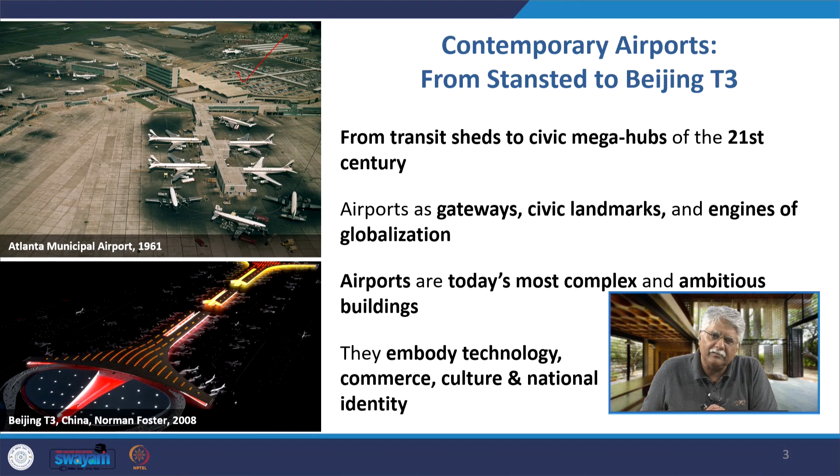Airports have also undergone tremendous change, from being transit sheds, as you see in this picture of the Atlanta Municipal Airport in 1961, just standalone airports. They have now become civic mega hubs and gateways, civic landmarks and engines for global growth. Airports are today very complex and ambitious buildings embodying technology, commerce, culture and even our national identity. So airports shape the first and last impression of a country.

Railway stations also do that, but many times railway stations or these multimodal hubs are confined to particular cities, and they do connect country to country also, but it is the airports which are more the national image that we see while entering or departing from a nation. They function beyond transit. They are associated with tourism, business, diplomacy, and governments invest heavily in airports because they project our national identity. So airports are shifting and now they are becoming mega hubs.

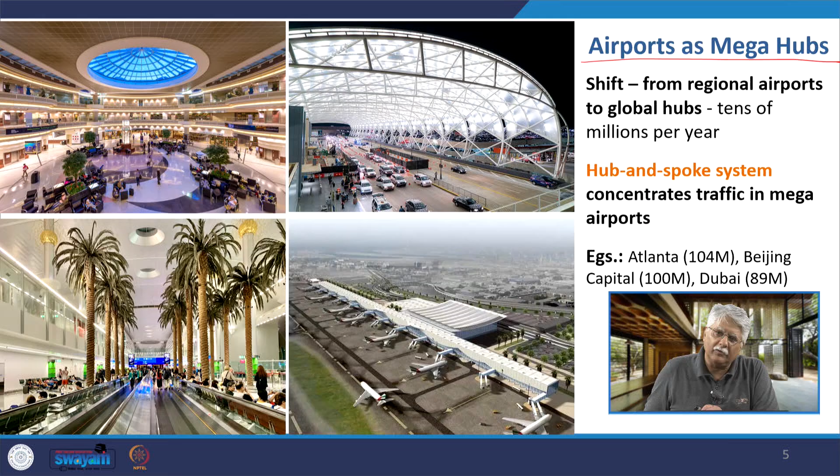From regional airports, there are global hubs. Tens of millions of people use airports every year, and there is a hub and spoke system that concentrates traffic in mega airports. What is the hub and spoke system? There is a central hub airport, like here in the United States in Atlanta, to which many spoke airports like Baltimore, Memphis etc. are connected. Passengers from the spokes converge at the hubs and are transferred to other flights. Many regional flights feed into this single large hub and create very high passenger volumes there. The hub can support frequent long haul flights.

They are massive terminals with very advanced logistics. Therefore, they've evolved into mega airports. In India, for example, when we talk of Delhi, Mumbai and other mega cosmopolitan cities, there we are talking of hub airports, and smaller cities are the spoke airports.

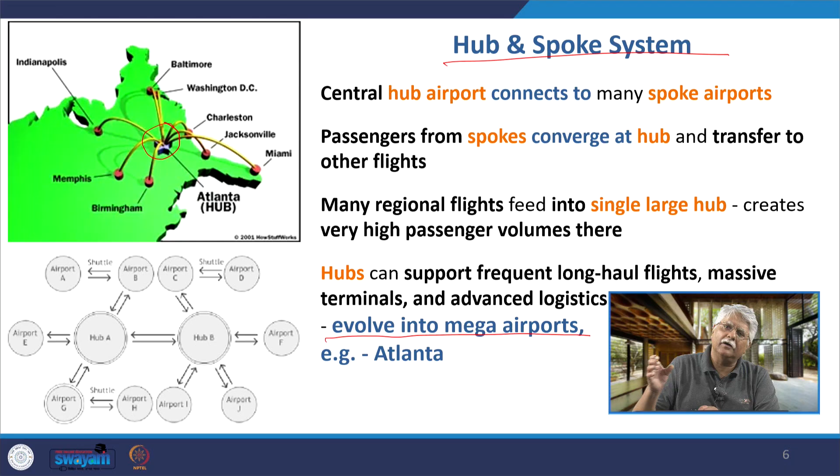And there is a similarity now between global air network and global railway density. This is a very interesting comparison. When you look at these maps, you see that the air traffic chart indicates the airports are confined to specific spaces globally, and very interestingly you find similar areas of concentration of railway multimodal hubs globally. So there is a shared underlying driver between airport hubs and railway station hubs. One is economic activity. Both are concentrated in places that are economically developed or fast developing economies like India and China, and industrialized regions.

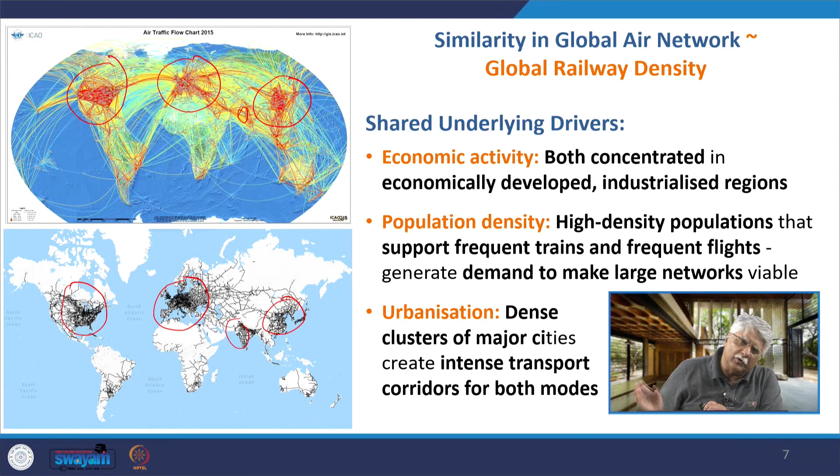The population density is a factor, where high density population supports frequent train and frequent flights, so that the demand is generated to make these large networks viable. Urbanization is a factor. Dense clusters of major cities create intense transport corridors for both these hubs. In many cases, airports and railway stations are part of the same multimodal system. For example, in Heathrow Airport, not only is it an airport, but it also has underground railways connected or linked with the airport, and similarly it's true for the Frankfurt Airport.

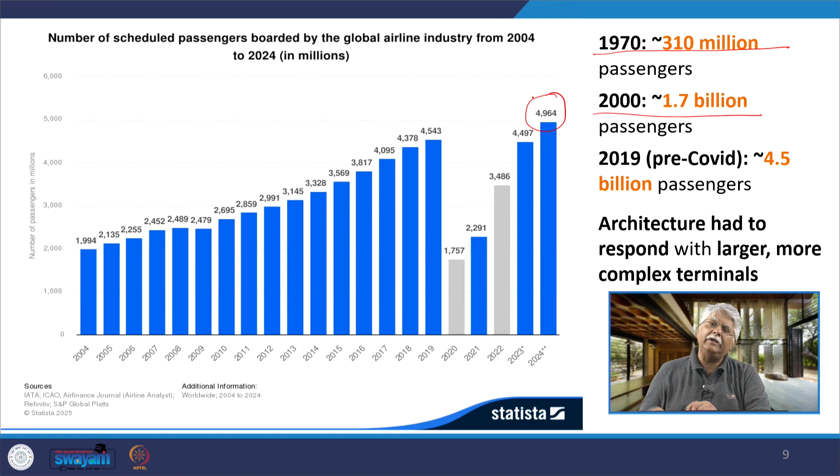This shows the growth in air traffic over the years. From about 310 million in 1970, it grew little over 5 times within 30 years to 1.7 billion, and by 2019, pre-COVID, 4.5 billion people were traveling by air annually. Architecture now had to respond to much larger and more complex terminals. As of 2024, about 4.9 billion people have traveled globally through air.

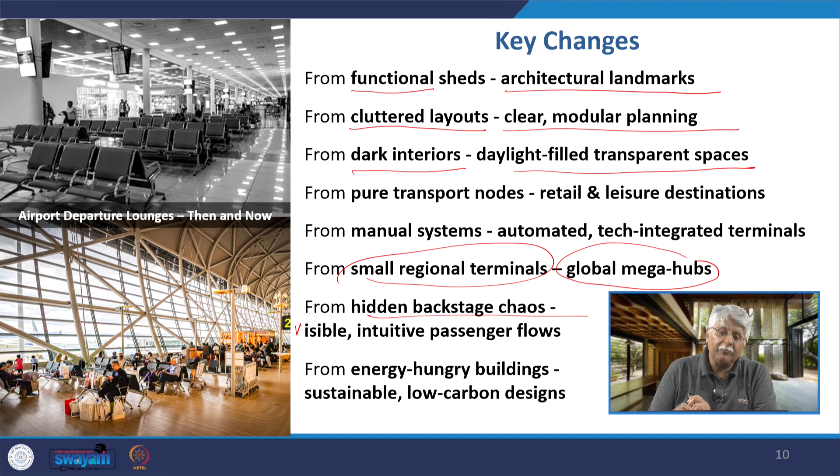So what are the key changes if we look at that once more together? One is from functional sheds, they are becoming architectural landmarks. From very cluttered layouts, there is very clear modular planning. From very dark interiors to daylight filled transparent spaces. From small regional terminals, they are becoming global mega hubs. Instead of a lot of hidden backstage chaos, there is visible intuitive passenger flow happening. And from energy hungry buildings, we are having sustainable energy efficient buildings today.

The other changes are in security protocols, particularly after the events of 9/11. Passenger comfort has increased tremendously. Commercialization has grown tremendously in airports with duty-free shops and retail.

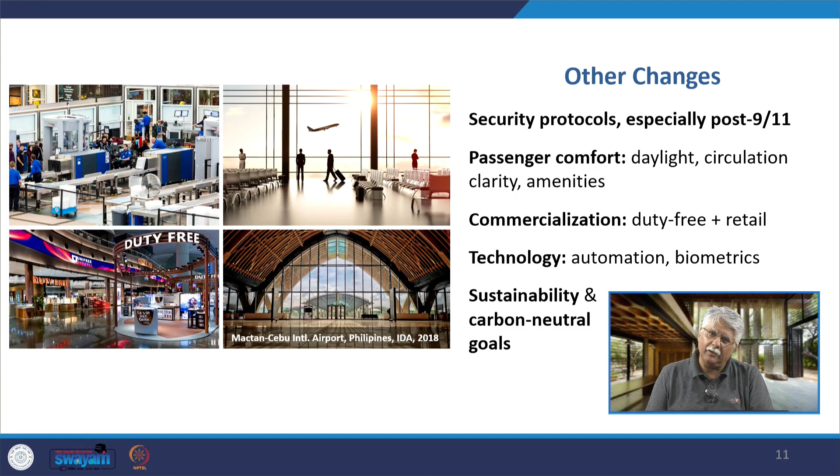Technology like automation and biometrics have become very dominant in modern airport hubs. There are sustainability and carbon neutral goals associated with airports. So they have become architectural icons today.

In the early 20th century, airports were more like utilitarian hangars and sheds. By mid 20th century, with the first machines for flying, they started becoming engineering marvels. By late 20th century, airports had become architectural statements, but today they are a hybrid of infrastructure and civic architecture.

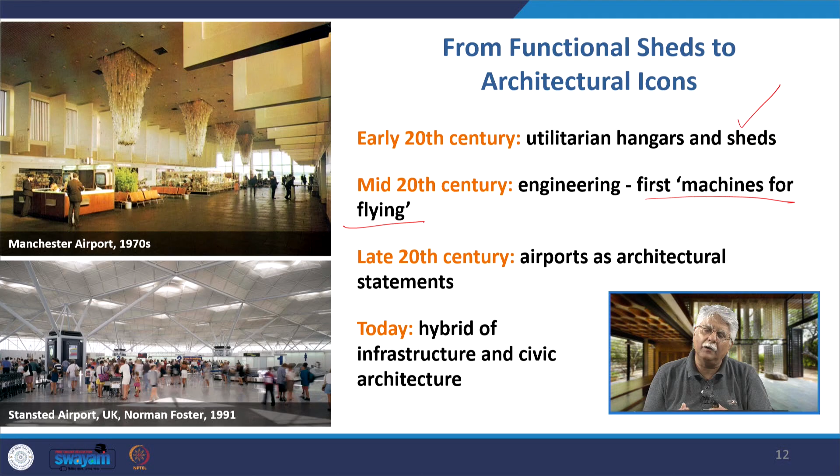They are multi-modal hubs globally. If you look at airport as civic architecture, they shape a city or nation's identity, like railway stations used to do in the 19th century. They act as gateways to nations and serve as symbols of technological progress and global connectivity.

Contemporary airports have grown into urban hubs on a monumental scale. They are very large, ambitious buildings with vast interiors, soaring roofs, and dramatic structures. What railway stations had done, today airports are doing. This is the Beijing T3 terminal, designed to inspire awe and civic pride.

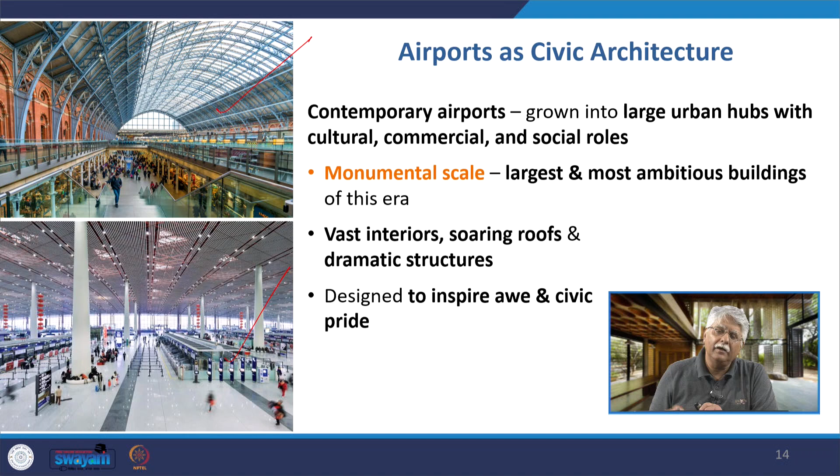They are also an architect's stage today. Star architects are associated with airport projects. These are very high profile commissions with world famous architects, signature projects just like museums are today, that define an architect's career and a nation's image.

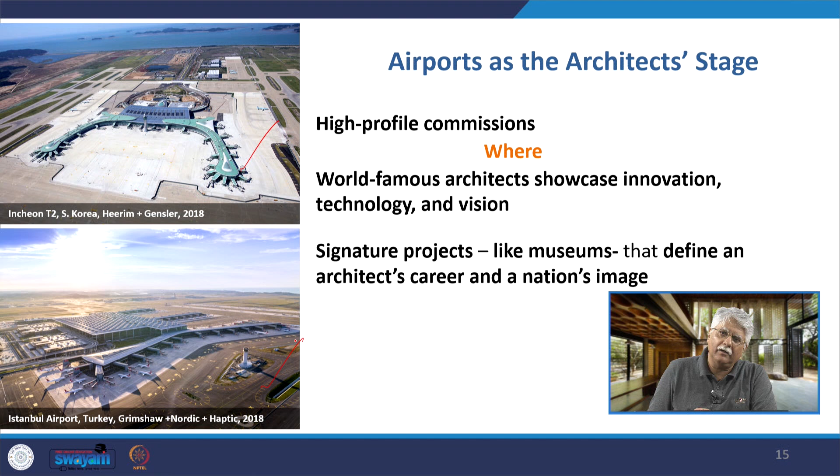For example, tremendously amazing airports like the Incheon T2 terminal in South Korea, or the Istanbul terminal by Grimshaw and other architects. So design here is seen as strategic. It improves efficiency, overall passenger experience, and the nation's branding. No longer just engineered spaces, they are architectural showcases.

For example, in Incheon Airport in Korea, they first had the original terminal, Incheon T1, built in 2001 by Fentress. Now the new one shown in the previous picture, the T2 terminal by Heerim and other architects, was built in 2018.

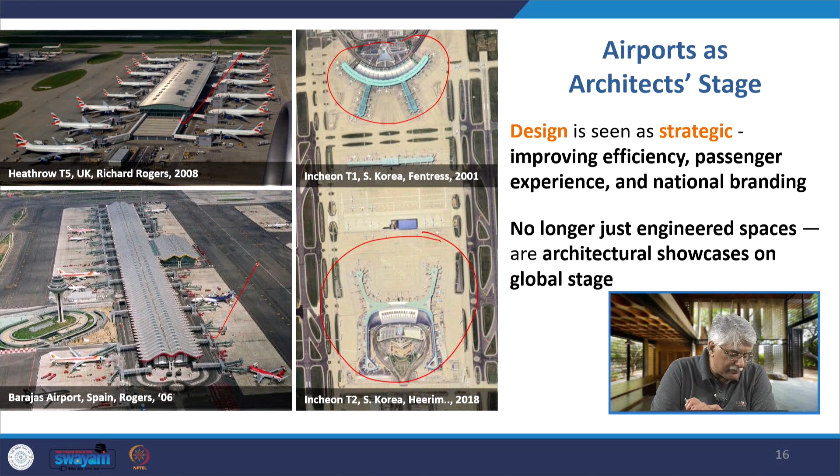Then there are other big terminals like Heathrow T5 and Barajas Airport, both by Richard Rogers, which we'll look at in detail, examining high tech and beyond. High tech architecture is the natural home of modern airports. Exposed structures, long spans, and modular grids are all associated with high tech architecture.

The original raw spaces like Lloyds of London, with exposed surfaces on the outside as I taught earlier, have now become experience-centered designs. There is a huge amount of technology that goes into making an airport, and high tech architecture really suits this brand of building or typology.

Airports are urban systems, as I was telling you. In fact, the new word being used for them is aerotropolis or airport city, coined by John Kasarda. Aerotropolis is a city-like urban form where the airport functions as a central hub around which there are business facilities and hotels.

Here is the Chek Lap Kok Airport in Hong Kong by Norman Foster, which brought about a tremendous revolution in modern airport design. It was a massive terminal built on a man-made island, but today it also has a hotel and a convention center, making it an aerotropolis.

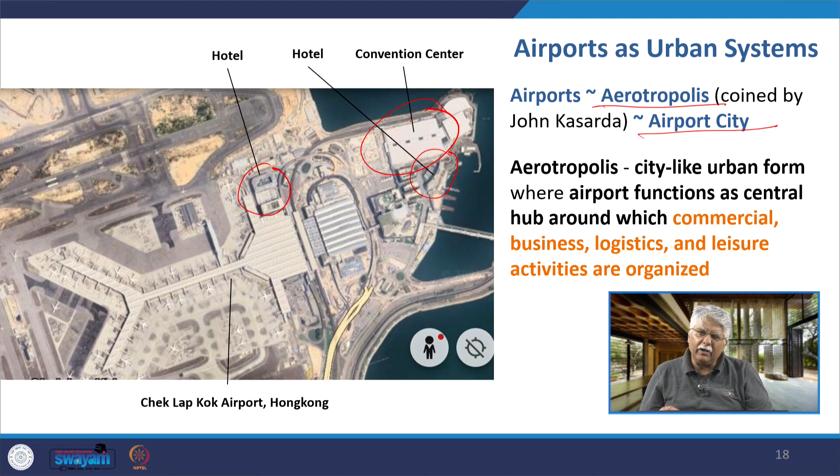Airports are therefore not just terminals, but like mini cities with hotels, convention centers, and transport nodes, equivalent to railway multimodal hubs. They are transport-driven ecosystems, and places like Dubai, Incheon, and Singapore's Changi Airport are all clubbed under this airport city category, where urban planning meets architecture.

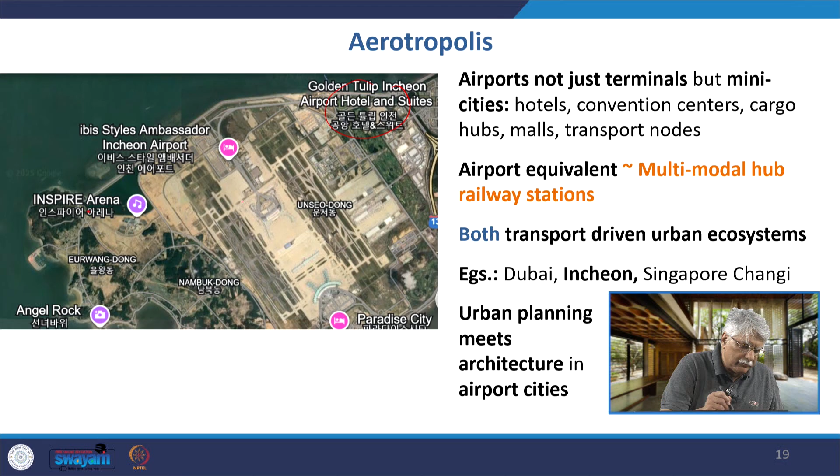For example, here in Incheon also you find the hotel and a lot of other facilities surrounding the Incheon airport in South Korea.

There is a timeline of landmark airports in which Stansted plays a very important role as a prototype of the modern contemporary airport. Then we have Kansai, an engineering marvel built on a man-made island in 1994 by Renzo Piano. Chek Lap Kok, also on a man-made island, a mega hub by Norman Foster in 1998. Barajas, which we will see in detail, is termed civic humanism. And Beijing T3, which is a global spectacle.

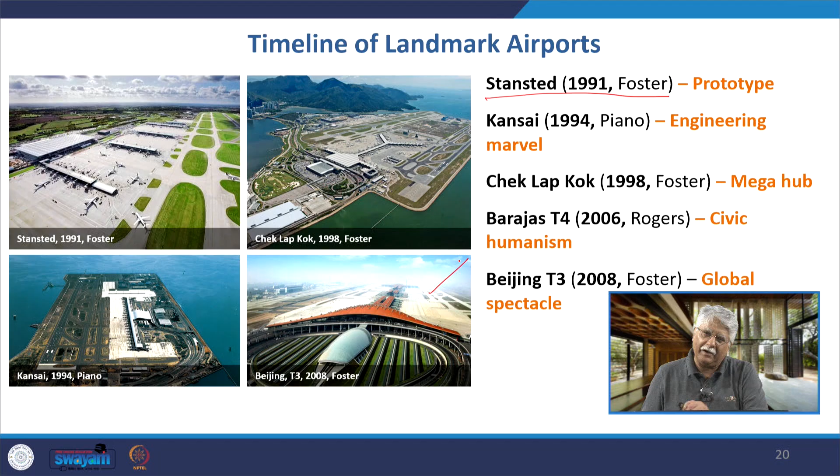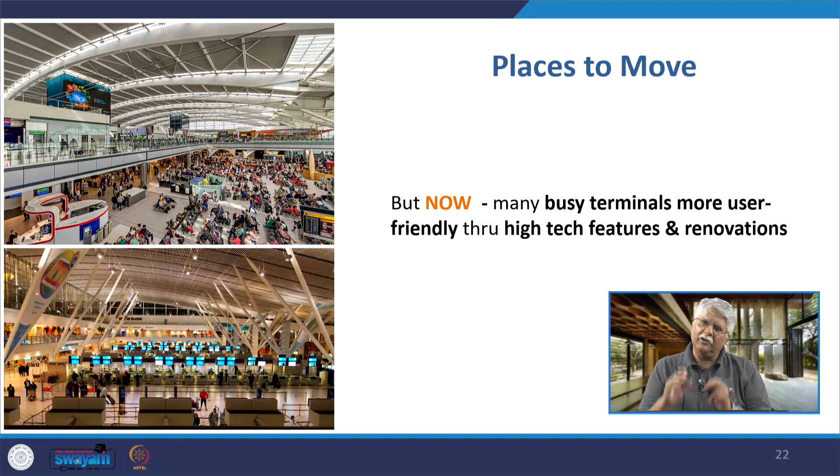In the 1970s and 80s, a surge in global air travel made big airports across the world very crowded and chaotic. But now, very busy terminals are much more user friendly with high tech features and renovations done in them.

If we look at a historic context, we need to go back to Stansted Airport in 1991. London needed a new airport because of increasing capacity. The previous airports like Heathrow and Gatwick were very cluttered and confusing. The aim was to have a very clear, legible, passenger-centered airport.

And this particular airport by Norman Foster challenged the very accepted rules of terminal design and went back to the roots of modern air travel. And so it is said that at Stansted, Foster transformed the terminal into a kind of cathedral of travel. This was a quote given in the New York Times.

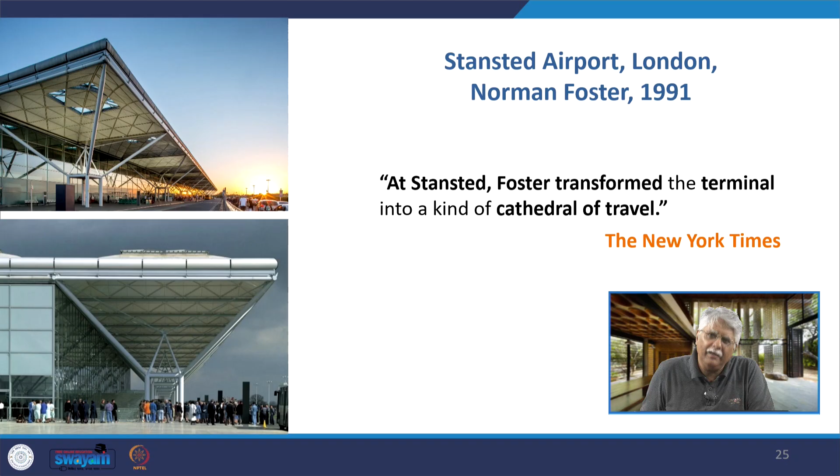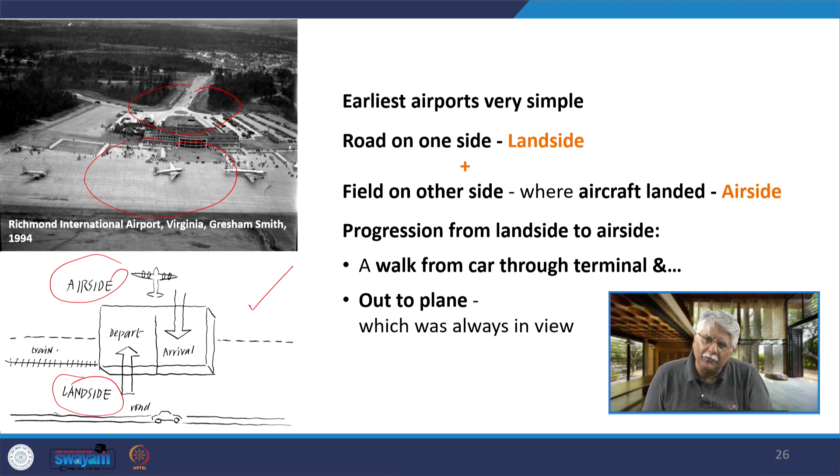What really happened? You see, the earliest airports were very simple. There was a road on one side, and then the flights took off on the other side of the terminal. This small sketch indicates that there is the land side where you come to the airport or you depart from the airport, and then there is the air side. So the progression from the land side to the air side was very simple. You walk from the car through the terminal and out onto the plane, which was always in view. But over time it became very crowded and chaotic.

What Norman Foster tried to do in Stansted was to recapture this clarity, to recapture this romance of air travel, this amazing thing that you are able to see flights land and take off, and throughout the airport there is this clarity and legibility. So Foster's sketch that you see here shows there is a very simple passenger flow, clear orientation, linear circulation from drop off to check in and the various other steps that we take before we get into a flight. There is transparency and visibility.

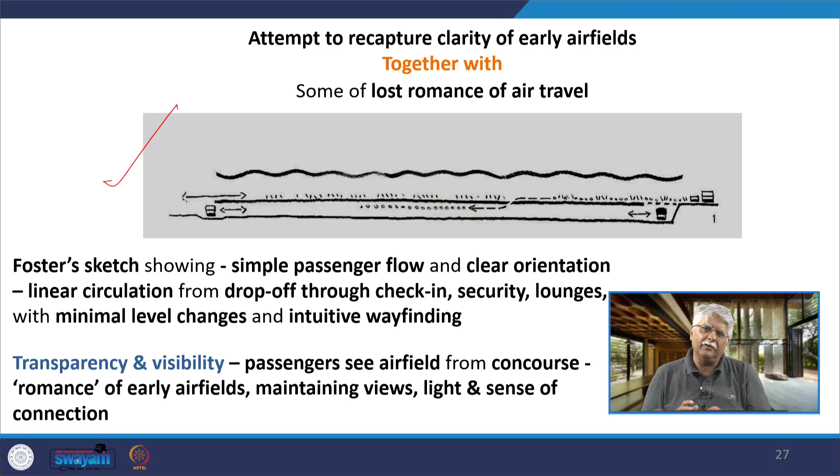Passengers were able to see the airfield when they were in the concourse. The romance of the early airfields, which maintains the views, brings in a lot of natural light and a sense of connection. Thus, Stansted Airport began with what came to be called a single envelope design. An airport terminal where all the functions are enclosed under one continuous roof volume and not scattered in multiple small buildings.

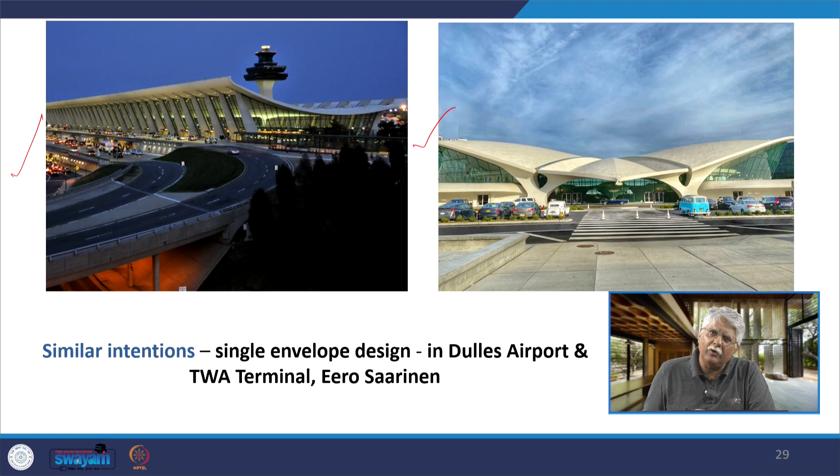Now I will have a check on this single envelope design because there have been two previous designs which had a similar intent, both designed by Eero Saarinen, the Dulles Airport and the TWA Terminal, which I have already discussed with you under late modernism. Both of them were single envelope designs. Why was Norman Foster's design so different or unique, though it was carried on from the same idea? Because he revived the concept of modular high-tech construction in the Stansted Airport.

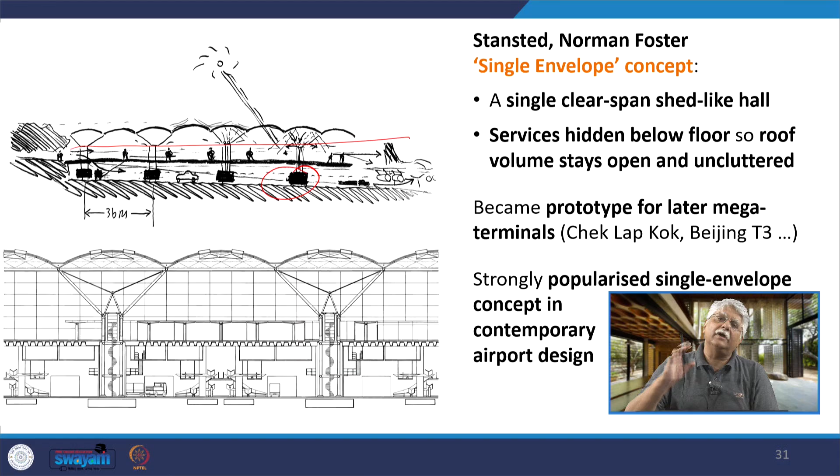So this single envelope concept has a clear span shed-like hall. Services were hidden below the floor under the concourse, so that the upper volume remains completely open and uncluttered. It became a prototype for all the mega terminals to come and strongly made the single envelope concept popular in contemporary airport design. It reversed the hierarchy, turned the building upside down, removed all the heavy services and took them to the undercroft of the building, keeping the concourse level completely free.

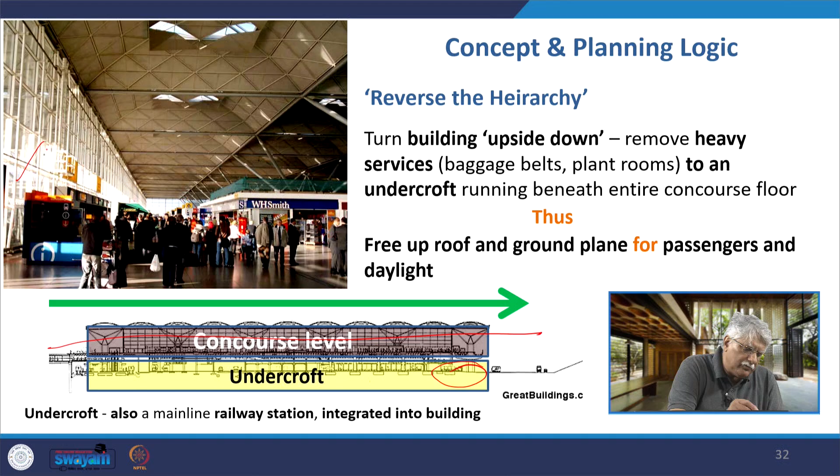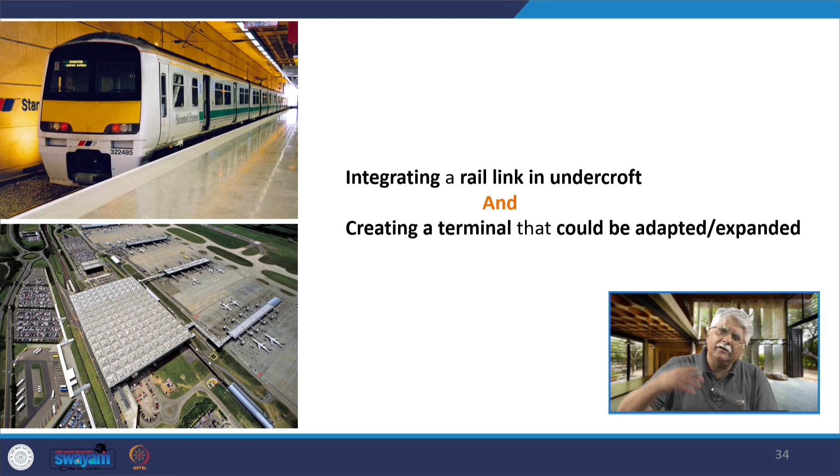Thus it freed up the roof and ground plane for passengers and daylight, as you see here in this picture and other pictures that I will show you. So the concourse became a single volume and the rail link was there in the undercroft, creating a terminal that could be adapted and expanded. So this modularity, the ability potentially to expand, began early from the Stansted Airport.

There was also light, space and wayfinding. From the traveller's point of view, the movement through the entire complex became very straightforward and direct. There were clear sight lines. The passengers could see the aircraft, the gates, the exits very easily. There's a lot of visual openness and that reduces stress and confusion when people travel. Travellers always know where they are in the Stansted Airport, which way they are facing. They can see all the 4 glass walls. It's a very huge enclosed space.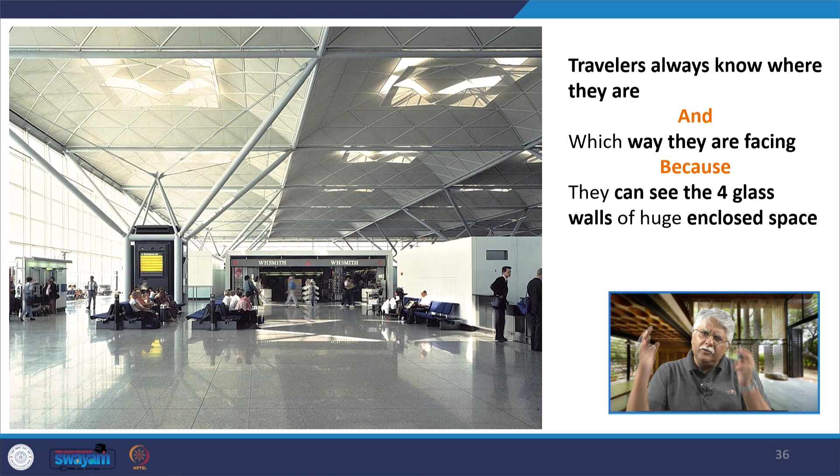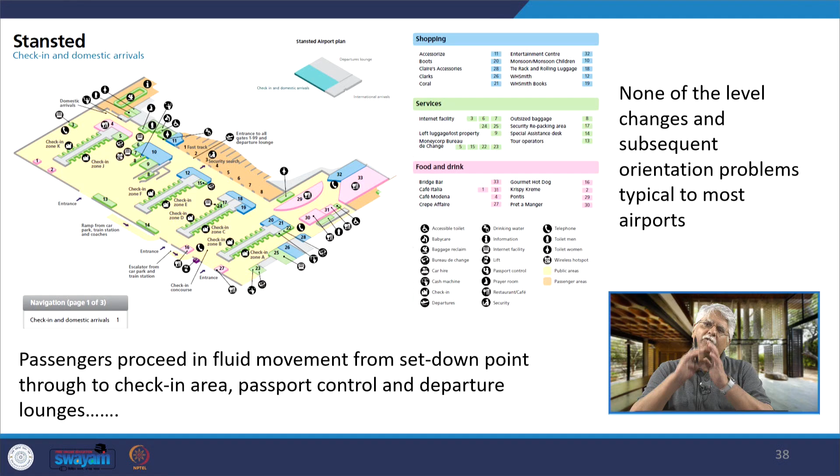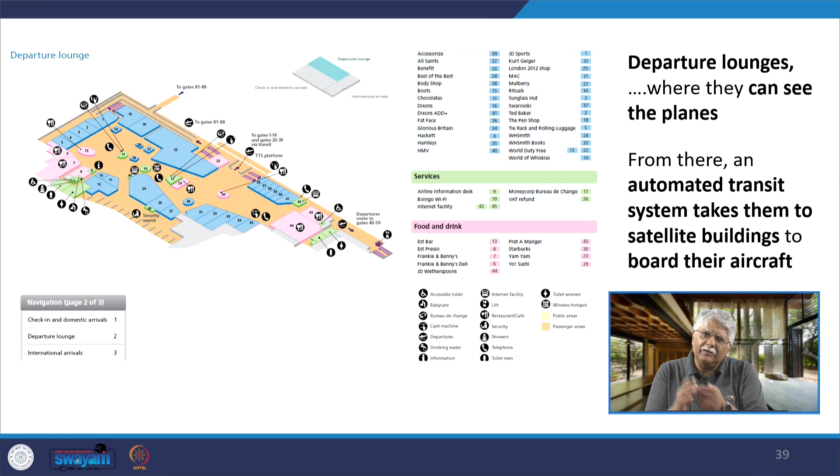So these are the plans that you can look at again to show how the airport has been organized. None of the level changes and subsequent orientation problems, as was typical to most airports, we find here. Passengers have this fluid movement through the airport. From the departure lounges, they can see the planes land and take off. There is an automated transit system that takes them to the satellite buildings to board their aircraft.

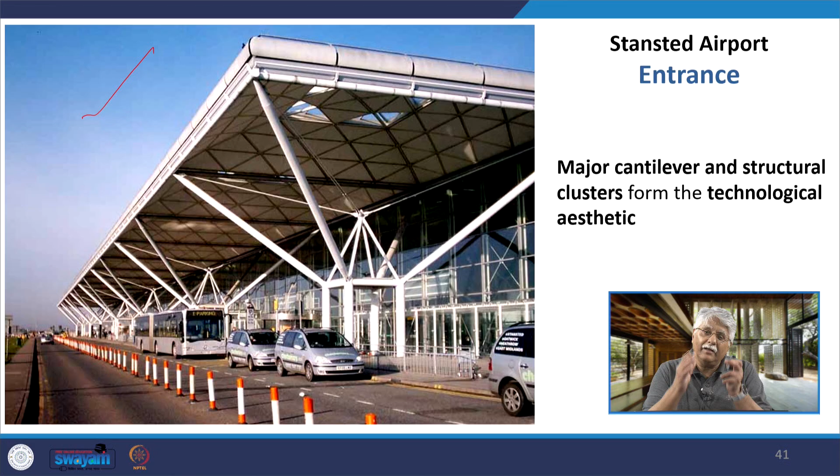This picture shows how the airport was built and the roof was built first. So we see the earlier ideas of high-tech architecture being brought into it, modularity and prefabrication. There is a major cantilever at the entrance of the airport and the structural clusters form the technological aesthetic of the building, as is true for earlier high-tech buildings. The focus is on flexibility and economy. The structure is very simple.

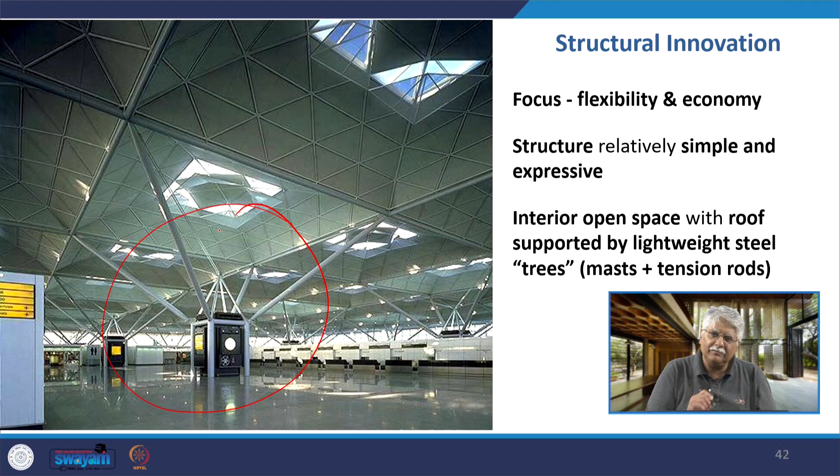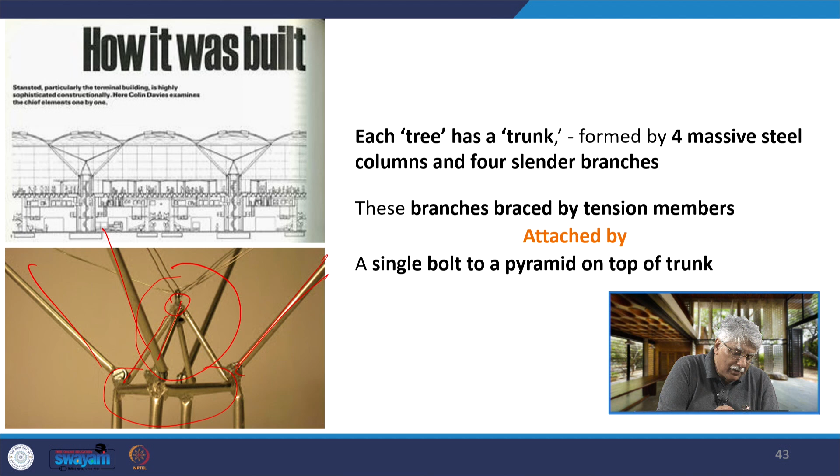Interior open spaces have a roof supported by these lightweight steel trees. It's a system of masts and tension rods. So how is it built? Each tree has a trunk. There are 4 massive steel columns forming the trunks, over which there are these 4 steel branches. In between them, they are braced by these tension members, which are all attached to a single bolt over this pyramidal shape on the top of the trunk.

So you see this entire structural system that is supporting a grid of 36 by 36 meter bay, and the entire thing can be expanded like a kit. So the original concept of kit of parts in high-tech architecture is applicable here. The terminal could be expanded, a long span structure with column free passenger space.

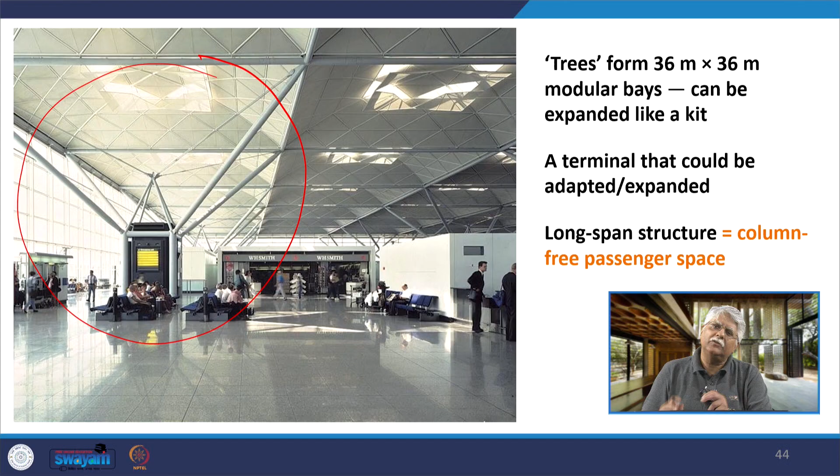There are these 4 steel branches that form this square grid and that support this space frame roof, which is a very lightweight roof to keep out rain and to bring in natural light from the top. So another thing that Stansted brought in is the concept of bringing in maximum natural light into the airport building. No mechanical, electrical systems were there in the ceilings or the walls. The structural tree in fact served to provide these services for air, light and power.

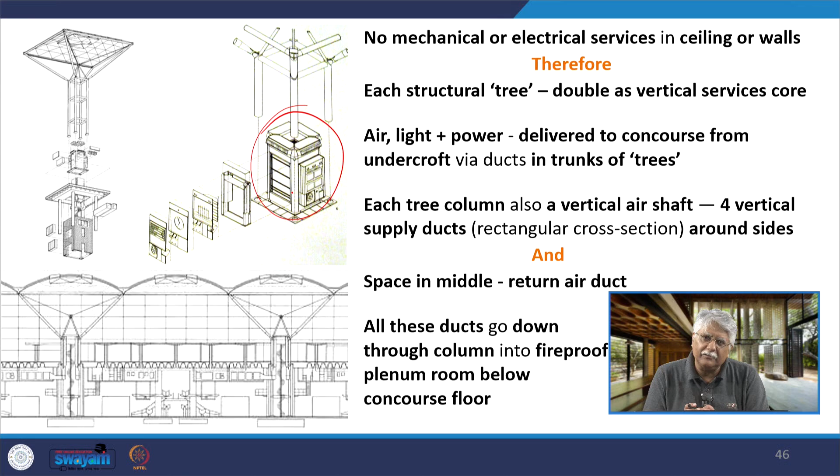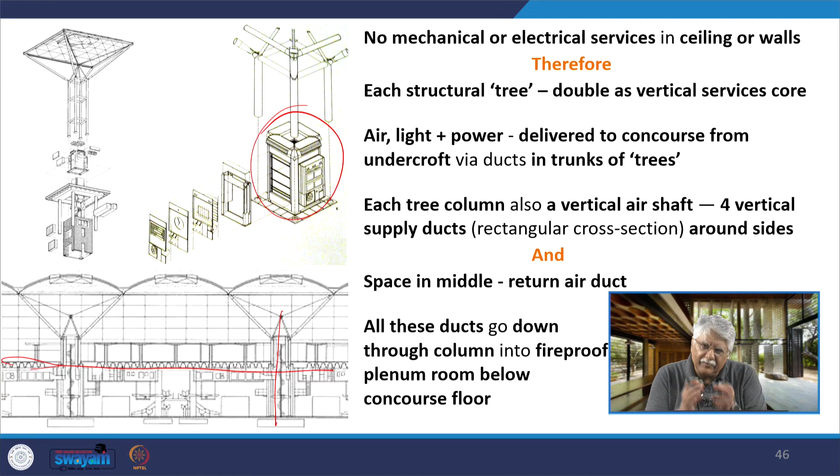Each tree column worked as a vertical air shaft with 4 vertical supply ducts around the sides. Space in the middle is for the return air duct. All of it is connected to the undercroft, there is a plenum room below the concourse floor here, to which the entire services network is connected. The AC plants are also hidden below the floor level, and the fresh air comes through the tree, and there is an intake of stale air also through the tree that also works as an automatic smoke vent.

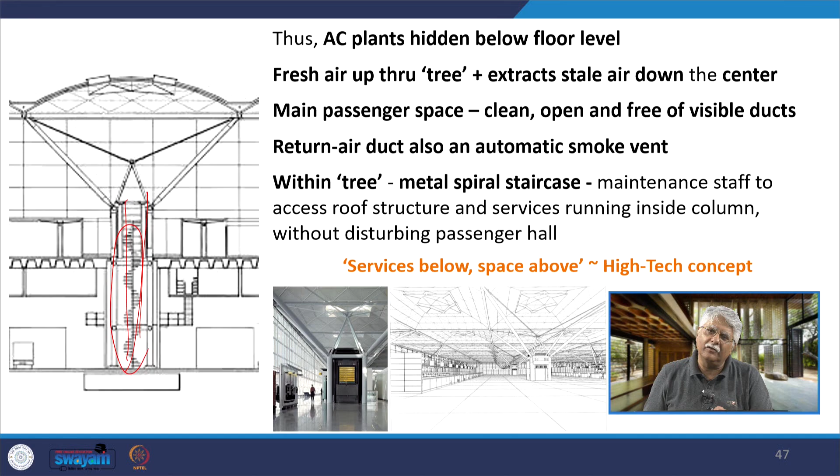There is also a spiral staircase given within the tree from the underground level, where the maintenance crew can come and service the airport. So services below and space above, the high-tech concept became applicable here. Around the outside of the trunk also there are services at the floor level, and this entire system is not attached to the concrete floor, so that if there is any differential movement, they will not be affected.

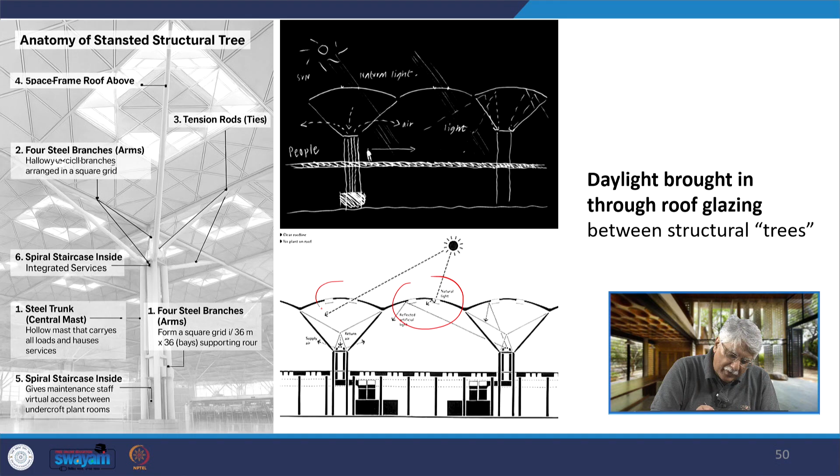There are also uplighters over this tree that combine with the reflective dome at the top, and thus there is a giant light fitting here. Glare free illumination happens throughout the airport, a similar concept that he tried to do in HSBC Hong Kong with the sun scoop and the mirror. Daylight is also brought through the roof glazing between the structural trees that you find here. Daylight is also coming in directly.

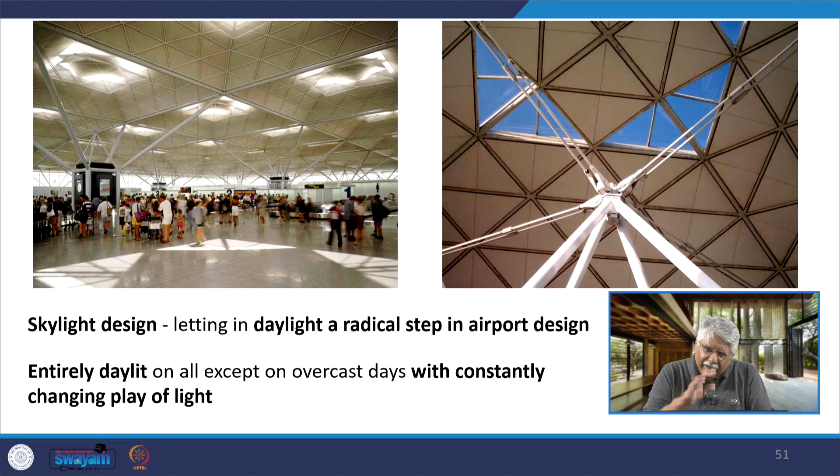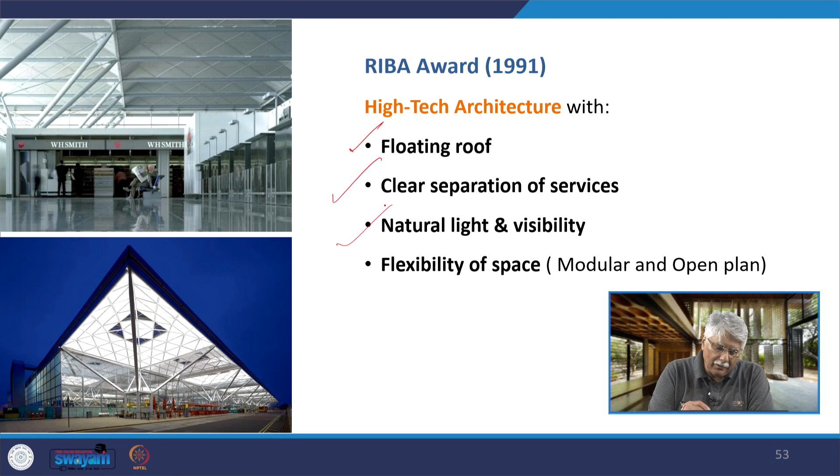So this skylight design of bringing in daylight was a radical step in airport design, entirely daylit except for very overcast days, and there is also constant change in the play of light from day to day. So there is industrial precision, exposed structure, modular logic, all a part of the high-tech architectural language. It got a RIBA award in 1991 with all these features like a floating roof, clear separation of services, natural light, and flexibility of space. A very modular and open plan.

In conclusion, we can say it was a pioneering single envelope terminal model which reversed the conventional hierarchy of how airports were designed. The structural system led to a lot of openness and abundant daylight. It had significant energy and economic advantages also. Running costs were half that of other parallel British terminals. It was a prototype of contemporary airport design.

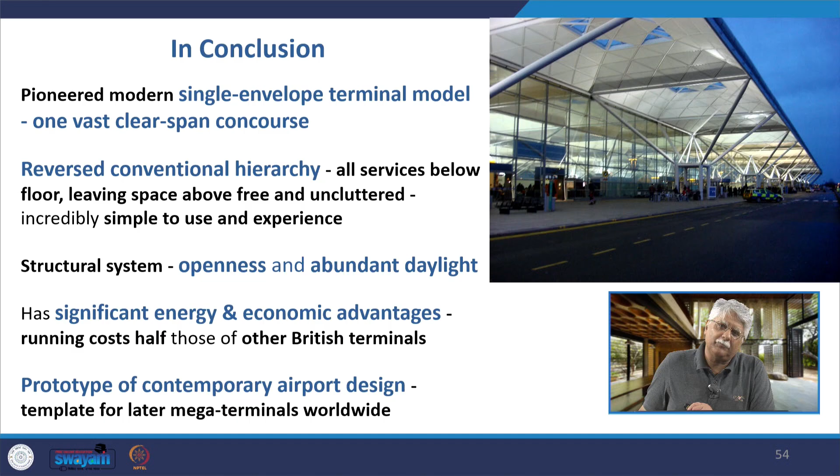So that shifted global thinking on terminal design, with the planning focused on passengers first, services below ground, and a modular expansion. Later mega terminals like his own designed Chek Lap Kok Airport and Beijing T3 followed the similar concept. Now as airports turned into these multimodal hubs, post Stansted, more evolutions happened. The concept of a central concourse and a pier arm layout. What is the pier arm layout?

A lot of arms projecting from the airport where passengers disembark and board the aircraft. Multiple piers and arms extend from the concourse. There are these boarding gates with these pier fingers or linear spine configuration, which allows for shorter walking distances rather than having many separate terminals, and it makes the whole expansion modular. So there is a centralized baggage and security system, and there is a very clear wayfinding because there is a single flow spine for the passengers when you want to board your flight.

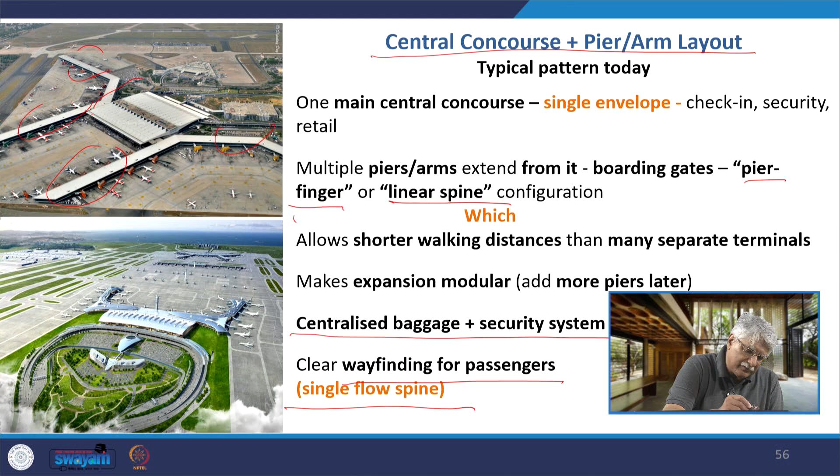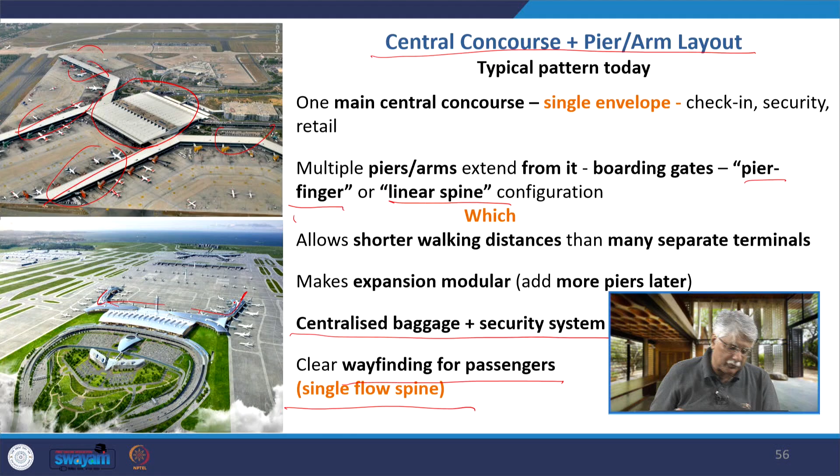So there is a central concourse which is common for all the common facilities, like the baggage handling, security systems, etc. Having crossed the security check when you want to board the aircraft or when you disembark, there are these arms around it. This is the Shenzhen Airport, and you see these arms here also. This became a common model for all contemporary airports, having this central concourse and a pier or arm layout, like we have it in the Mumbai airport by Skidmore, Owings & Merrill.

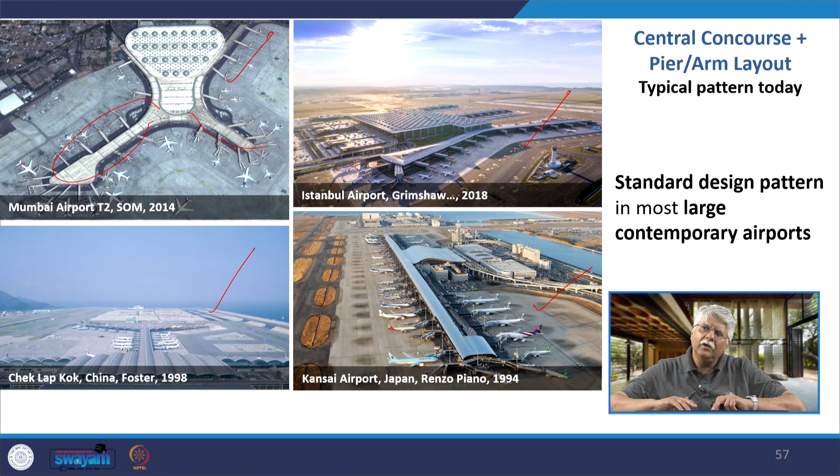You see these arms here. We have it in the Istanbul airport. We had it in the Chek-Lap-Kok Airport, which was one of the first mega airports to be built with this concept, and then it was there in the Kansai Airport in 1994. It also had it before the Chek-Lap-Kok. The big thing about the Chek-Lap-Kok was a much larger concept of an airport hub.

So, two or three points I will repeat. One is airports, like railway stations, have become multi-modal hubs. They are literally like airport cities today. Rather than having different terminals, there is more the idea of a single envelope designed concourse with several arms projecting from it, where you board or deboard the aircraft.

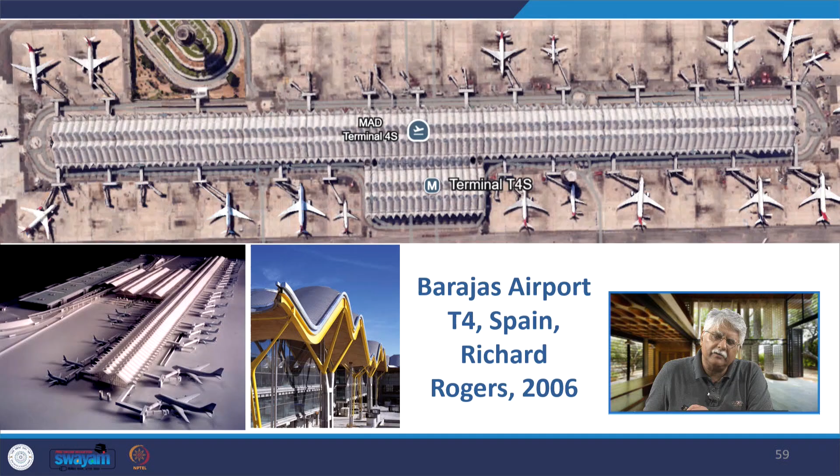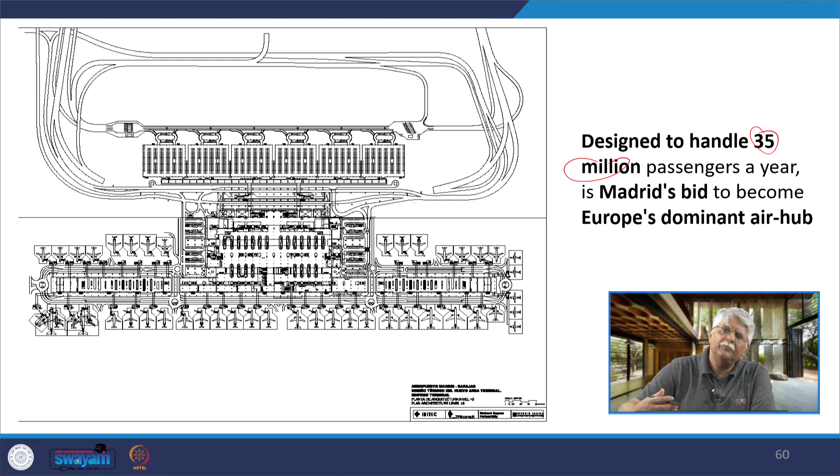This is the example of the Barajas Airport by Richard Rogers in Spain, the Terminal T4, 2006. Designed to handle 35 million passengers a year. Madrid's bid to become Europe's dominant air hub. Now please remember that these figures are from earlier data. Today the number of passengers flying from these airports is constantly increasing.

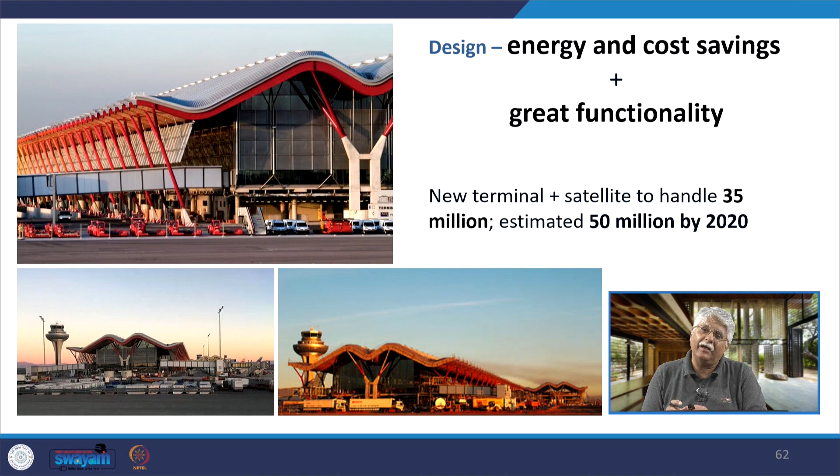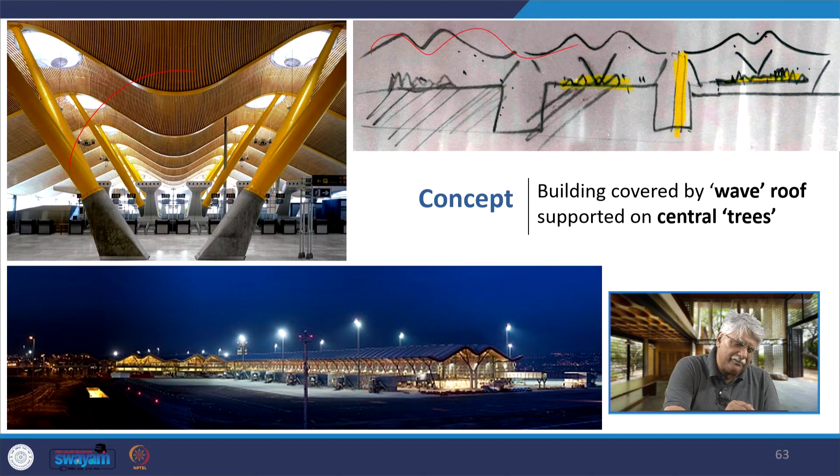This also is a single envelope design, and it is based on energy and cost saving and great functionality. So it was estimated earlier it will handle 50 million passengers by 2020. Of course, this must have grown further. The concept was the building is covered with a wave-like roof supported by these central trees, a concept we saw also in the Stansted Airport.

The design process is focused on creating a very attractive and quiet experience with this corrugated roof at the top, having this bamboo ceiling, and the columns are in pairs having a range of rainbow colors in them, and the colors help in wayfinding for the passengers and also soothe the passengers as they negotiate the airport. A similar method of wayfinding, not using colors, is also there in the Kansai Airport by Renzo Piano.

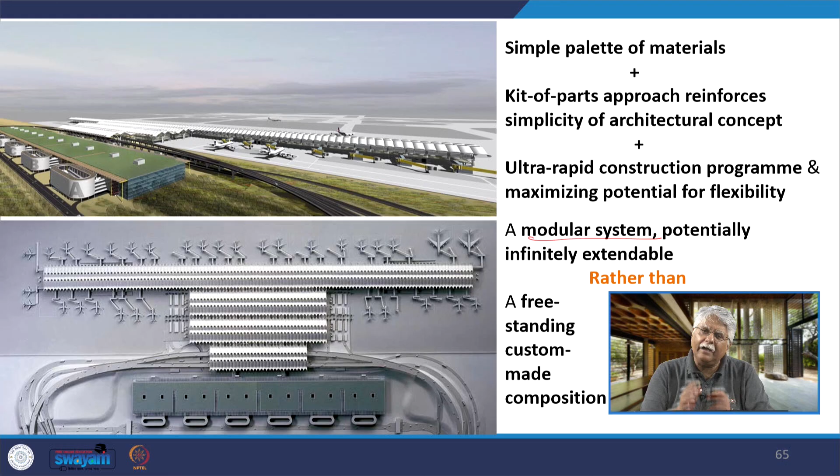This is a very simple palette of materials, a kit of parts approach, ultra rapid construction program, maximizing the potential of flexibility, so much so that the modular system used again has the potential of infinite extendability, rather than a freestanding custom made composition. What is a freestanding custom made composition, different from this modular approach?

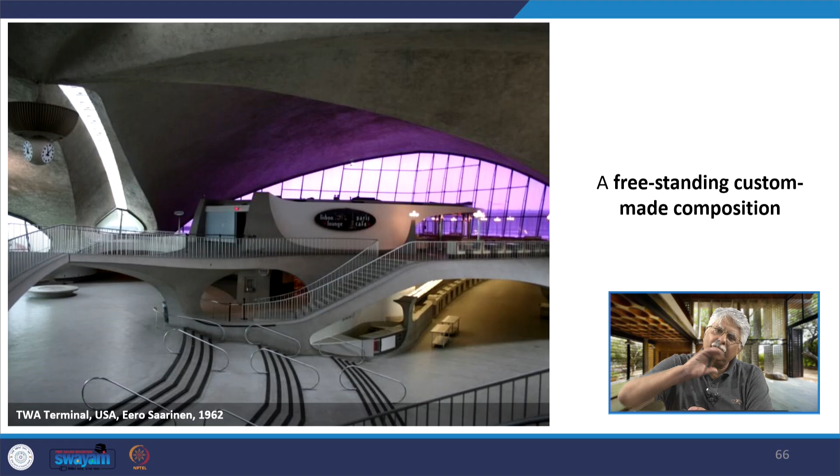This is the example of a freestanding custom made composition, the TWA terminal by Eero Saarinen, which does not have the potential of expandability. The sheer size of the building reflects an assembly focused approach. There is an assembly focused approach here. It is a flexible system, an 18 by 9 meter structural grid that can be added on, and each one is to serve multiple uses like check-in desk, security check.

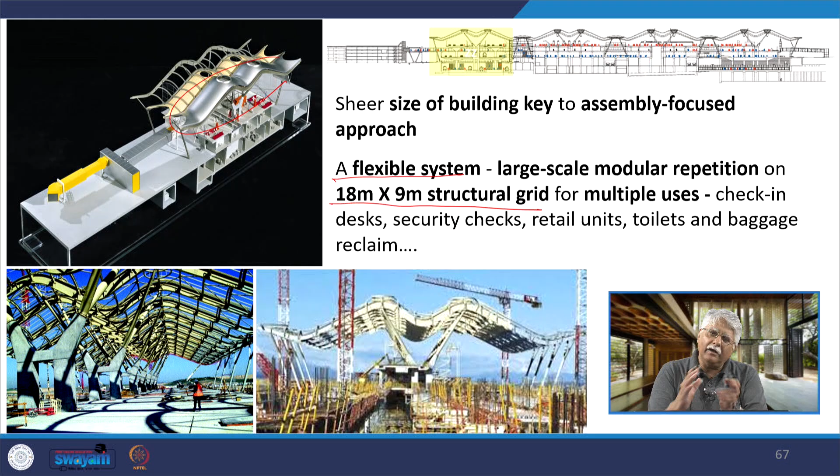That means throughout the airport the same modular grid is used, and multiple functions are served underneath the same extendable model. Within this modular system, the roof is the defining architectural element. It floats over the building and then it is supported on the edges by these props. Now there are 3 underground levels. So if you want to see it again, there are 3 underground levels and 3 levels above.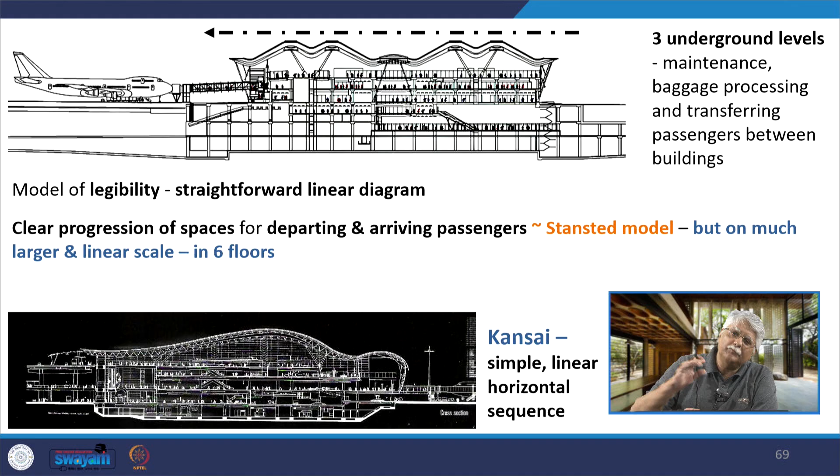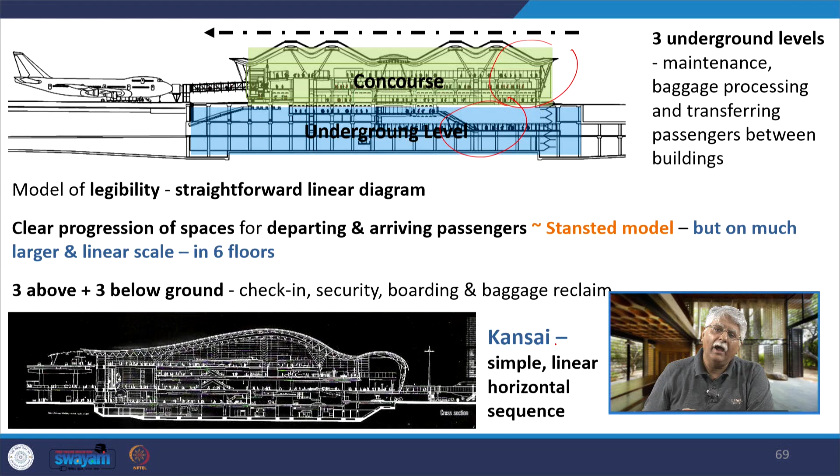The model legibility is this straightforward linear diagram, just as we saw in the Stansted Airport. But here the progression of spaces for departing and arriving passengers, though similar to Stansted, is on a much larger and linear scale in 6 floors, 3 above, 3 below ground, having check-in, security, boarding and baggage. So again, like Stansted, this has a concourse and this has an underground level. Kansai also has a simple linear horizontal sequence.

Now the difference between Stansted and Barajas also has to do with the scale of the airport. Barajas is a much bigger terminal in comparison. Stansted had passengers moving on only one level in a clear straight line. So you go from curb to check-in, security, departure and to the gates. In Barajas, it's a multi-level vertical layering in which departures happen on the upper levels and the lower levels are connected to the upper levels by escalators.

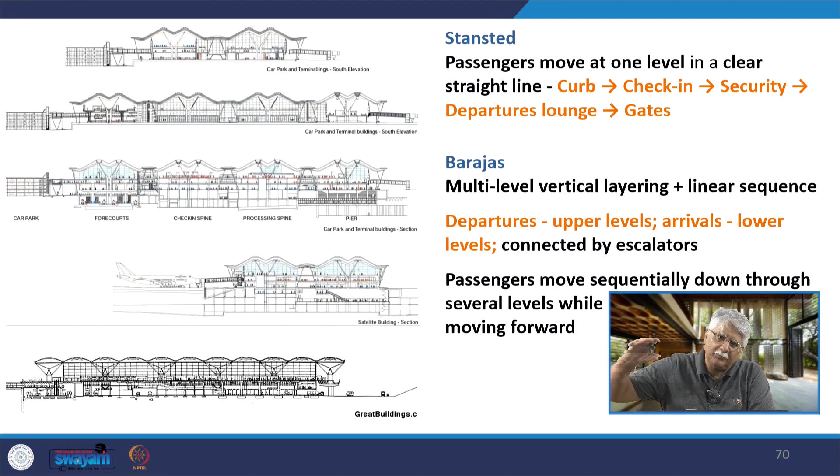Passengers still move sequentially through the several levels while moving forward, but it's a bigger airport. Still, the single envelope design prevails. Given this multi-level section, the strategy is to bring natural light deep into the lower levels, and that is done by something called a light-filled canyon. So the concept that began with Stansted still holds true.

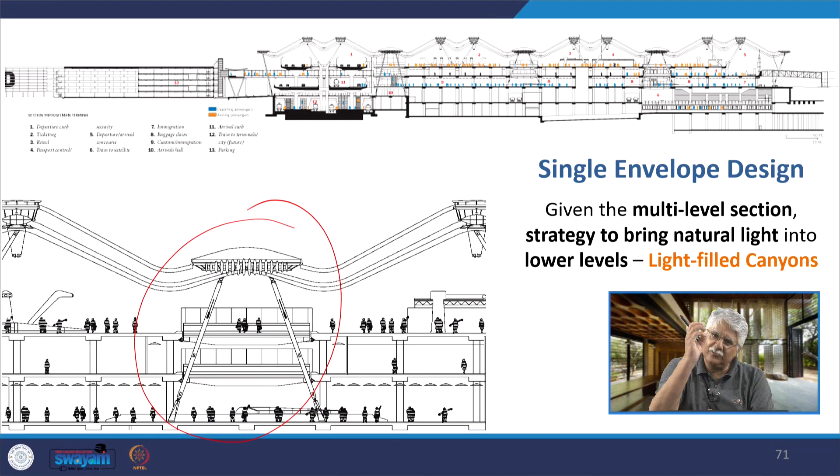Natural light has to be pulled into the deeper recesses of the airport. So here, not only do these canyons that you see here bring in light deep into the airport from the top, they also separate the different sections of the airport. Rather, they indicate the different sections of the airport related to the transit from arrival point to check-in, security, passport. There are these sequential spaces that these canyons are separating in parallel sections.

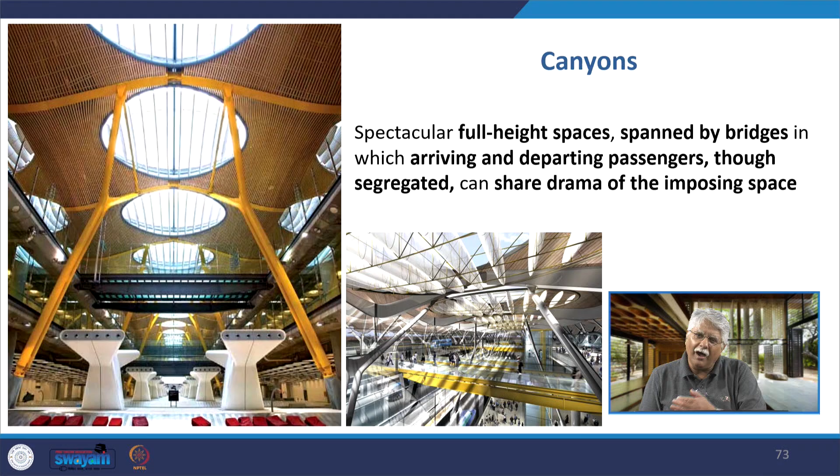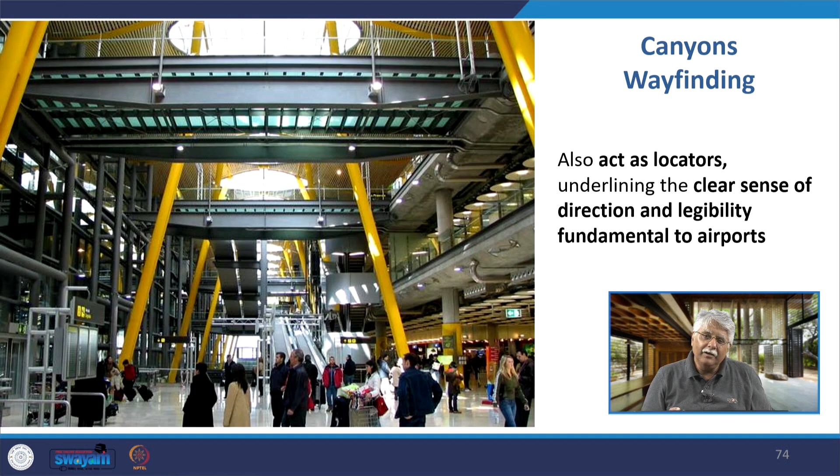So, these full height spaces are also spanned by bridges where arriving and departing passengers are able to see each other, but they are segregated from each other. They also act as locators. There is a clear sense of direction and legibility, which is so important for modern airports, which are so huge.

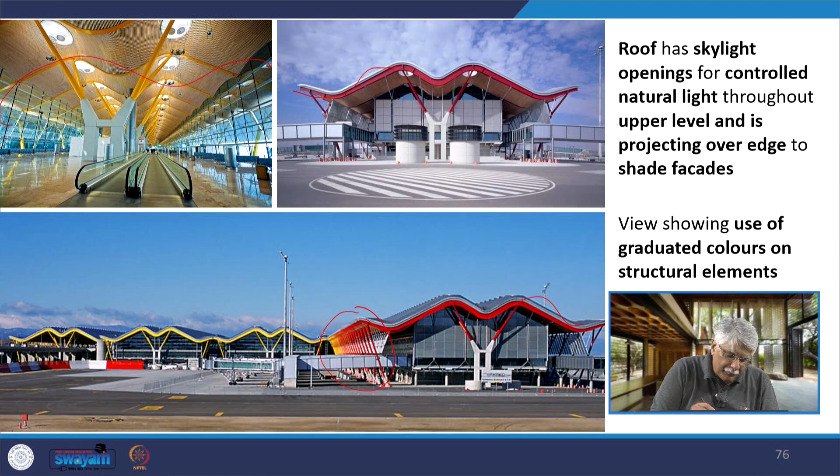Moving forward, this introduction of natural light and reduced dependence on artificial light. The roof has skylight openings which bring in controlled natural light throughout the upper level that you see here, which leads to the departure area, and they project over the edges to shade the facades of the building. Here also you see these graduated colors in the structural elements, not only in the columns but also in the wave roof. You find different colors have been used.

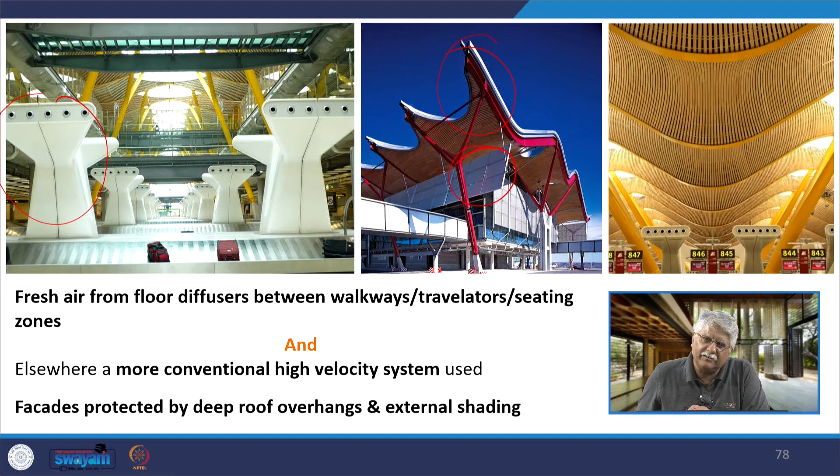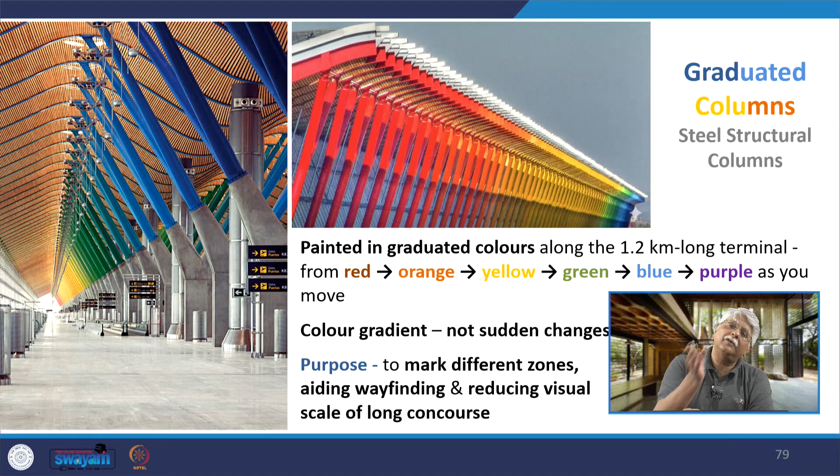Graduated columns, why are they important? They are painted in these colors from orange, yellow, etc. This color gradient ensures there are no sudden changes. There is a graduated change in color, and the purpose is to help in wayfinding and also to reduce the visual scale of a very large concourse and de-stress the passengers. So, it is a very novel idea used by Richard Rogers, and if you recall, this use of colors was seen earlier also in the high-tech buildings designed by Rogers like the Centre Pompidou.

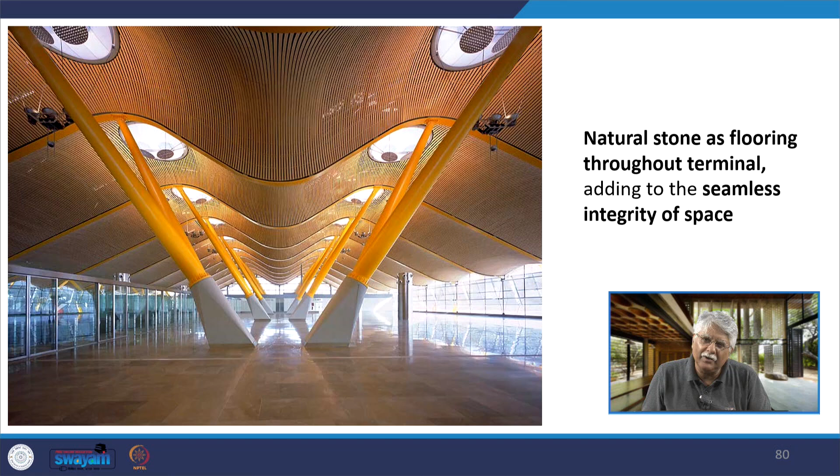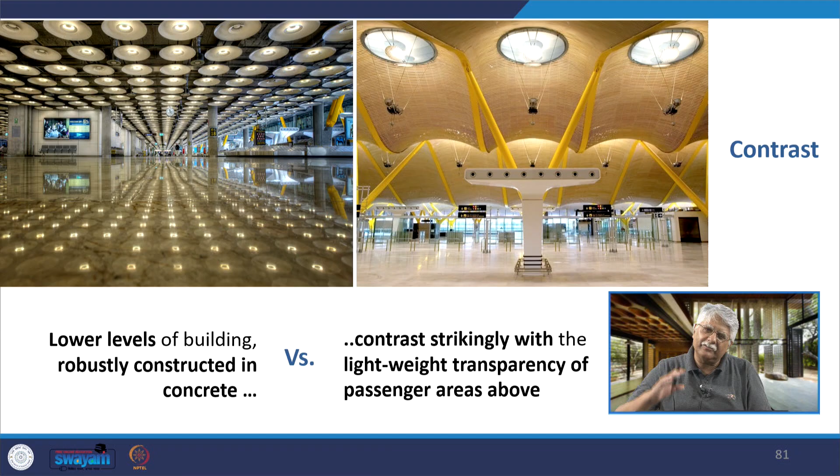So, natural stone flooring has been used throughout the entire terminal to bring about this seamless integrity of space. Now, there is a contrast in the way the 3 lower levels and the 3 upper levels are designed. The lower levels of the building are robustly constructed in concrete, in contrast to the very lightweight and transparent construction of the upper levels where the passenger areas are.

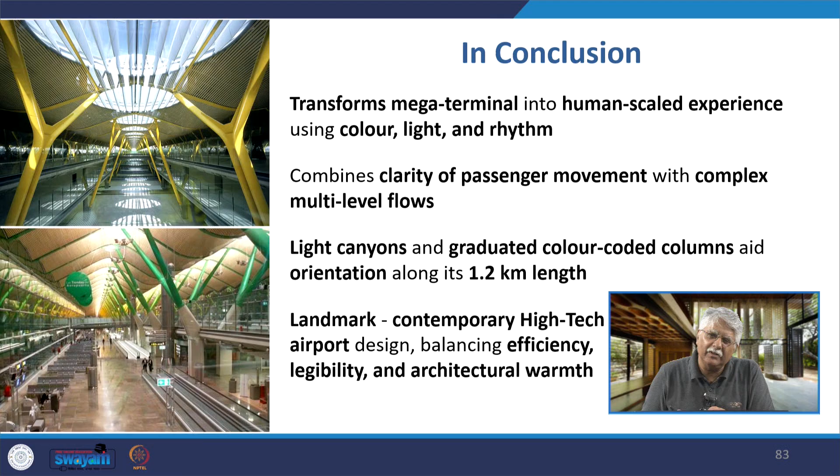In conclusion, the entire airport transforms the mega terminal into a very human scaled experience with the use of color and light. There is a clarity of passenger movement and more simplicity in wayfinding through the airport. Light canyons etc. have been used to bring natural light into the building. There is a graduated color coded column system to orient the passengers through a very long terminal. It is a landmark of contemporary high-tech airport design balancing efficiency, legibility, and architectural warmth.

These are some of the iconic airports that you can look at later. There are a couple of these that I will be talking to you about in later slides. For example, Beijing T3 and the Kansai Terminal.

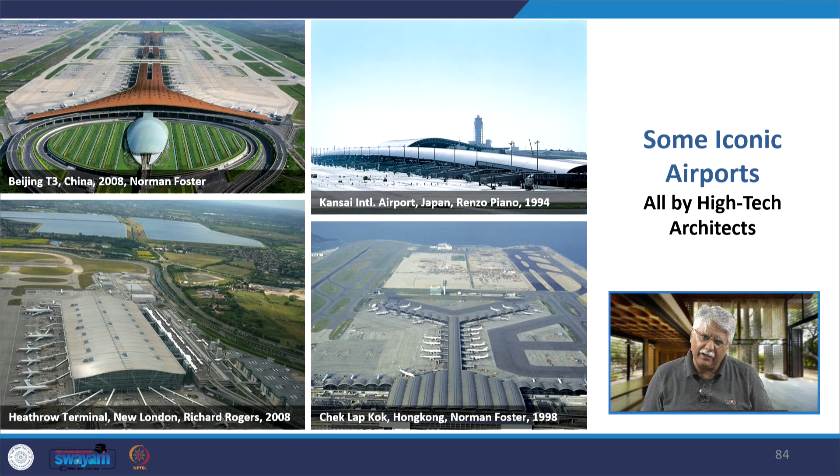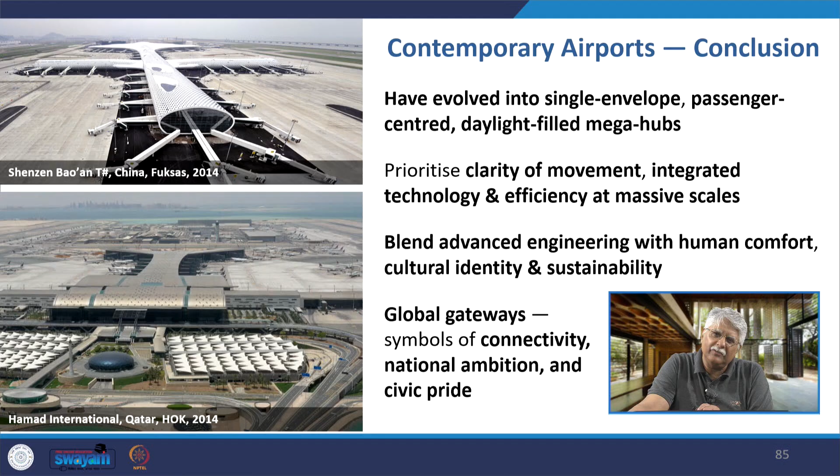Thus, like railway stations, contemporary airports have become these mega hubs or multi-modal hubs, and have evolved into single envelope, passenger oriented, daylight filled terminals with a lot of clarity of movement, very necessary for these massive airports, integrated technology, advanced engineering blended with human comfort, a sense of cultural identity in many airports and sustainability, becoming global gateways of connectivity, national ambition and civic pride.